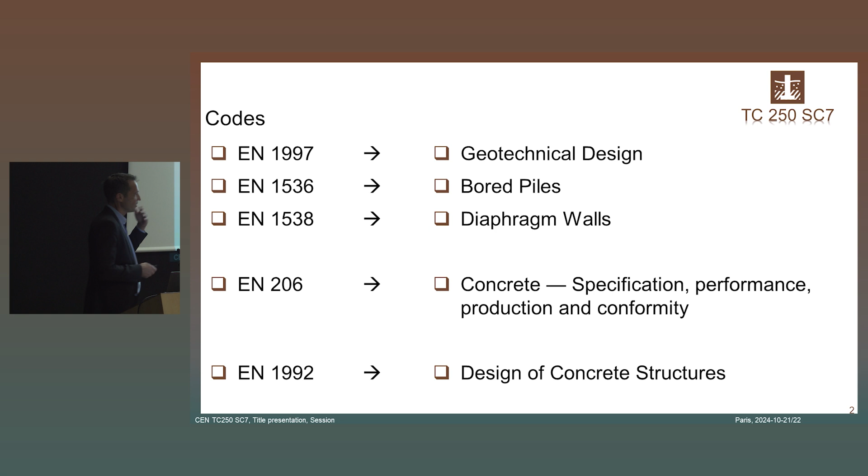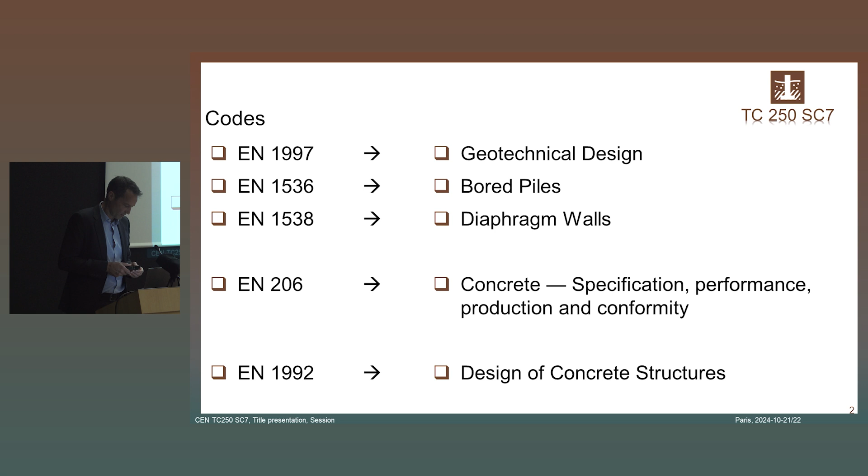These are the European norms I want to refer to. First, the top section is what I call the geotechnical works, the design and then the execution, where there's a very strong link between them. For many of these geotechnical works, we need concrete, and if it's reinforced concrete, we also need the structural code for concrete structures. That all together makes it

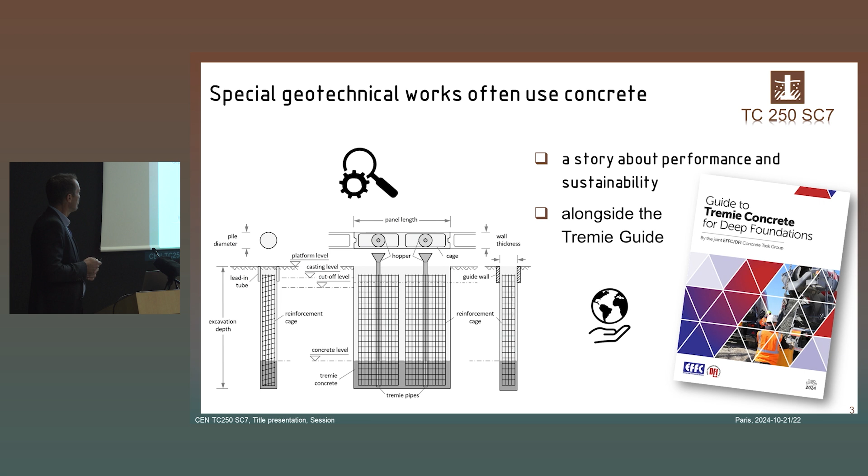the special geotechnical works, which is a better word for me than deep foundations. Anyhow, we often use the word deep foundations, and that's a link from the industry, from the European Federation of Foundation Contractors. We established a guideline making kind of a bracket of all these codes, from the design over the execution and with the concrete, as you can read by the topic, concrete for deep foundations. The link is the concrete in the end, because these kind of deep foundations or retaining walls we have to fill with concrete to make it a functionable, reinforced concrete structure.

So that's more or less the red line I want to use. This is what you design and what we execute, if it's not perfect, let's say. And these imperfections had been the reason, more than 10 years back, to introduce a group of experts from consultants and from the industry to work on this Tremie guide, we call it in short Tremie guide, bringing all the aspects together from the design over concrete to execution.

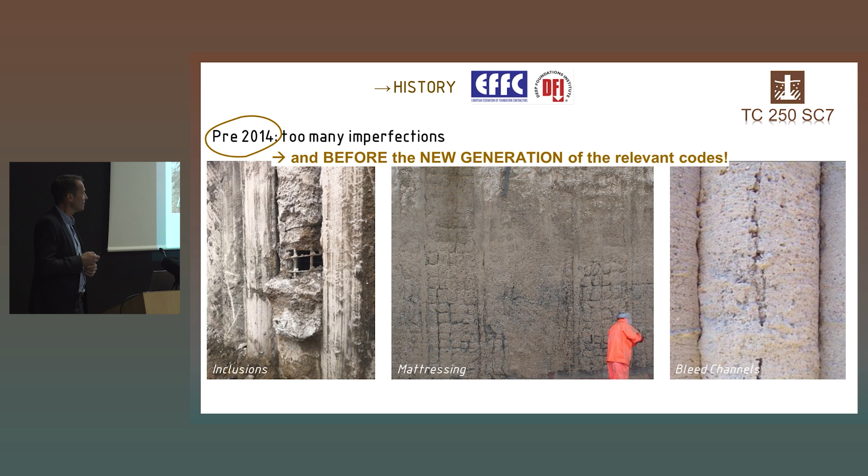So what we want to avoid is these very bad inclusions where any material is trapped into the permanent works. The middle one more or less addressing the lack of enough reinforcement cover, or not enough clear space for the concrete to flow through, or bleed channels, which is often a minor issue, but anyhow it's obviously an imperfection to these works. And if it's bad, then it's at the right.

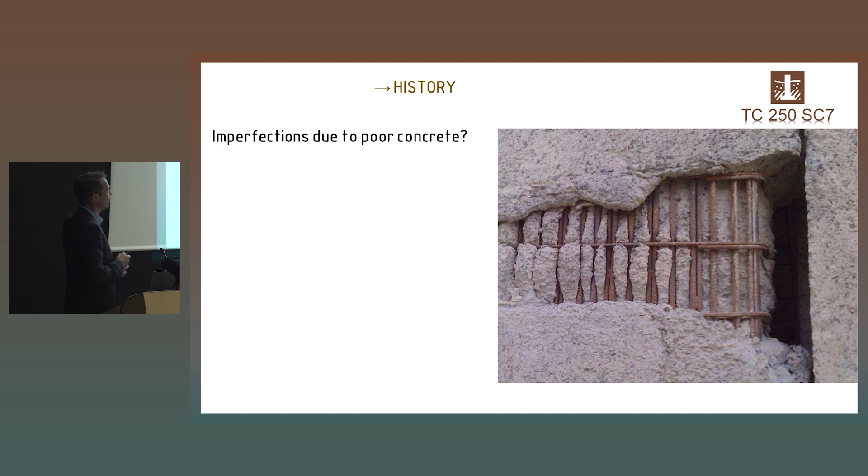I like to use this example from a study in the Netherlands, titled Bentonite Inclusions, where you can see that someone already made some pre-assumptions about what is the reason for this faulty or defective diaphragm wall panel. And in fact, it's a complexity in the end.

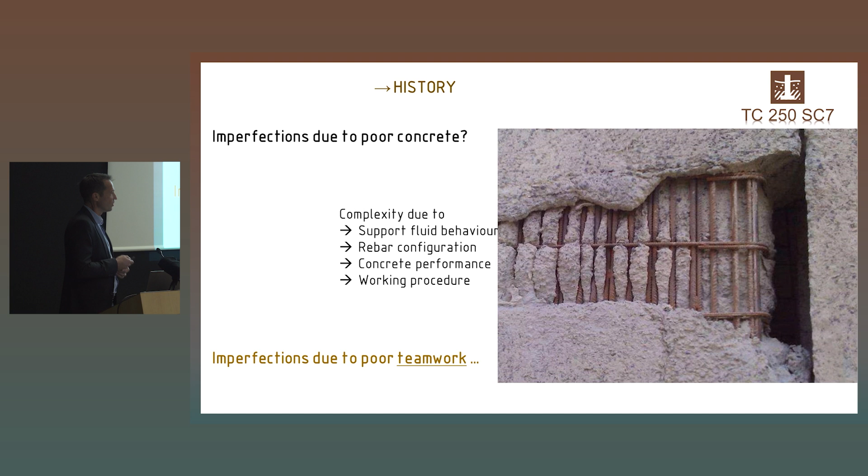So you see in the middle, or you can at least assume there is overlapping bars, so the reinforcement has just a little space for the concrete to flow through. So it's a splice section. It can be the bentonite, can be working procedure, or just a bad or poor quality of concrete. In the end, I would say it's not the perfect teamwork which led to this bad example of geotechnical works with a defect.

This is just going a bit back, because we try to find out what happened to the concrete over 50 years. Let's say 50 years back, when the concrete was what we call a three-component type of material, just aggregates,

cement, and water, life was quite simple. And we had a principle of good workability at sufficient stability, which means no segregation of gravel, etc. in the concrete. And then we had this application rule in the end.

With a new concrete, or new generation of concrete, already many, many decades old, we got additions and admixtures as well. So you had a lot of ideas to compensate your concrete. And at that time, when the standards were just not developed further, just copied and used again, we ignored this principle of good workability at sufficient stability, because the material is not the same anymore from its rheology.

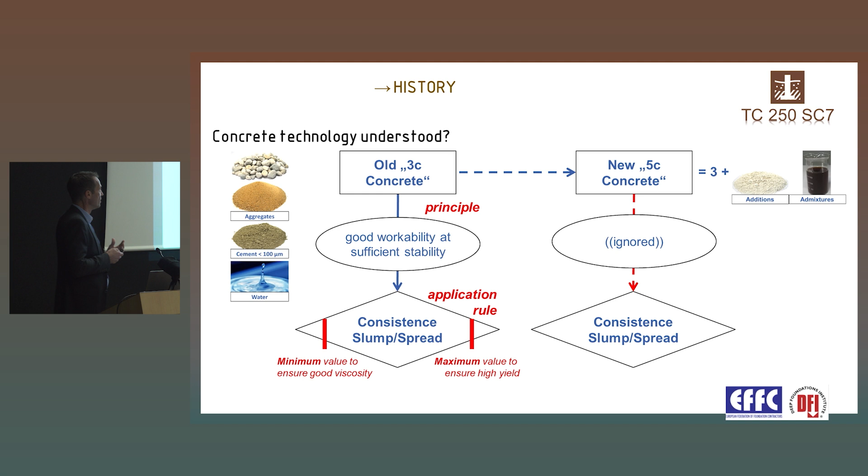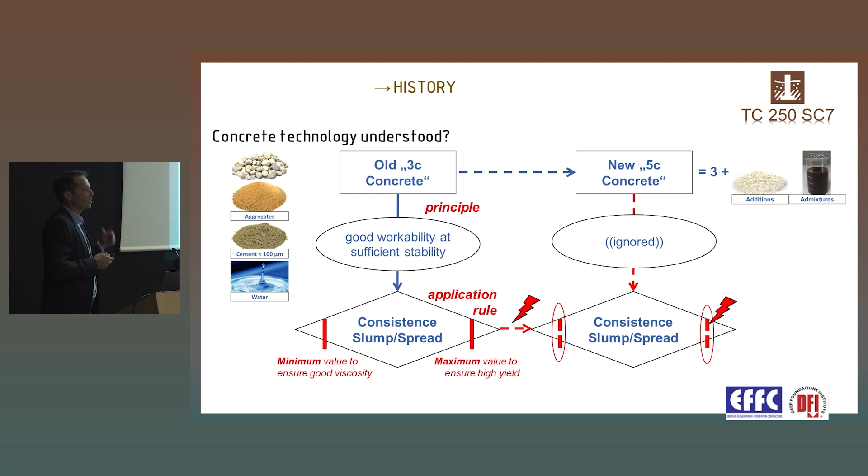But we still use the same application rule, consistence, and for slump and spread. That's the only one, let's say, measure we can take, or we took at the site. And that was the starting point, that we have to change this one.

We started the group, that's very short. We started the group in 2014. We had a very large, extensive research program with two universities in the US and in Europe.

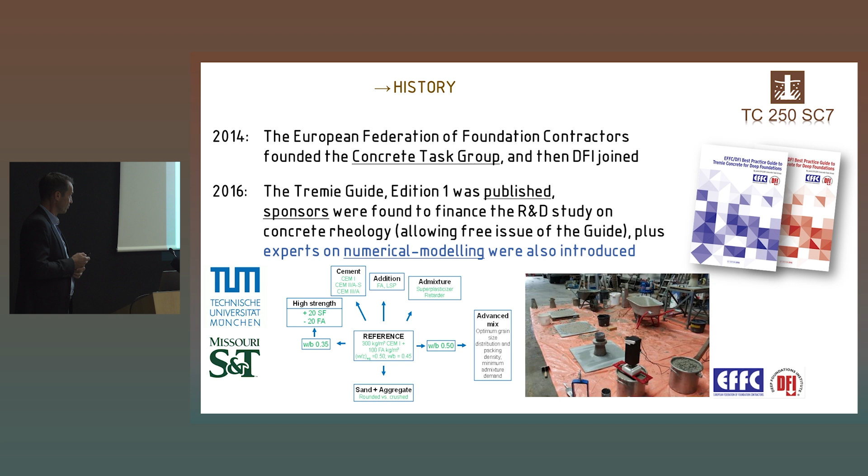And then we brought out a second edition of this Tremie guide, having all this information included, and proposing new acceptance criteria, new ways to design concrete, and to really rate the quality of concrete by a performance-based concept.

If you want to see more of these, you're invited to Bruges in Belgium next year in May, where there's this EFFC conference where you can see more examples of practical applications.

This new third edition of the Tremie guide is coming out this month, in November, and it has still the same agenda. You see with the table of contents that it connects all these aspects of design, design related to cage detailing, and then specifying and testing of concrete.

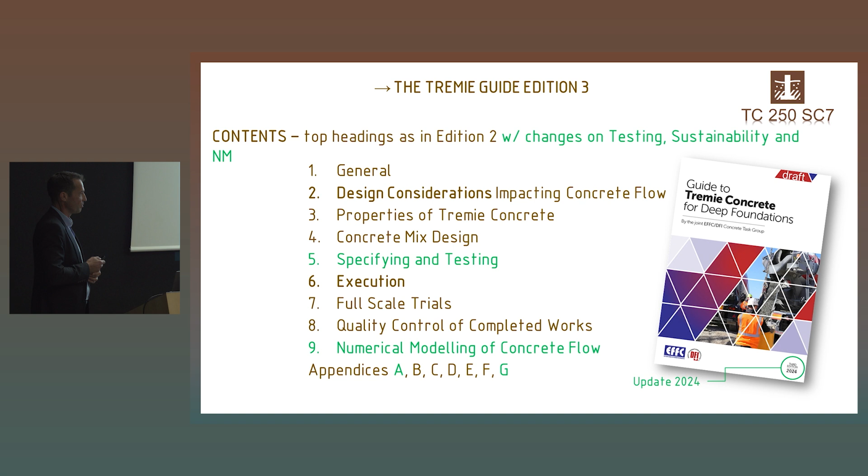We have many execution examples and recommendations in there, but we also talk about full-scale trials, the connection to EC7, quality control of completed works, and non-destructive testing. Section 9 is still an evolving chapter on numerical modeling of concrete flow, because we can learn a lot from numerical modeling, much easier than doing full-scale trials in the end to learn.

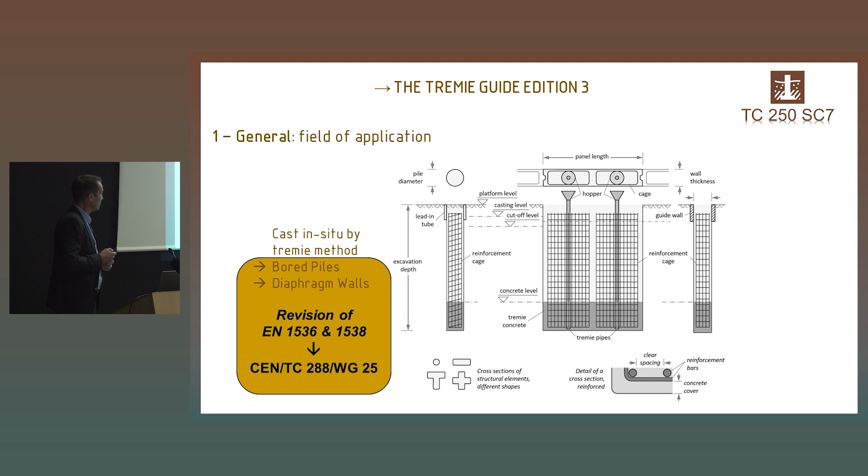In this graph, you can see that all these norms are connected as we go through the course of getting the right concrete for a certain job site. We start with the design, then the structural design in any case, and then we need the constructor with the concrete experience and knowledge to balance the concrete in the right way.

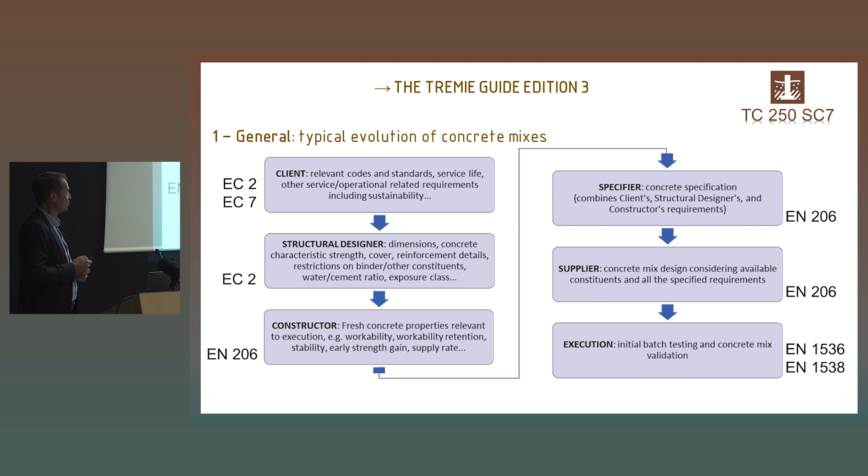And in the end, you have to order something at the supplier, and then we come to the execution and just have to fill the concrete in the borehole or into the trench. This will probably also be in the new EN 1536 and 1538, with 1538 then shown with a rectangular picture.

And we use the same terminology, of course, as the Eurocode. In the former version of the execution standards, there was a bit of a misunderstanding, I would say. C-nom, C-min was a bit controversial, but we will clean it up, and in this Tremie guide it's already done.

So if you want to go for a nominal concrete cover, you have two reasons, and you should choose the value from structural reasons or executional reasons. But the maximum value is, of course, the one you have to apply in your cage detailing. I'll come to this later—it should be 75 millimeters at least for C-nom.

The spacing itself is much wider than the structural works the EC2 guys usually know, because we need to have the concrete flow by itself, just by the weight of the concrete head on top, through the reinforcement, as you saw with the picture before—it might be hard to flow through a very tight opening.

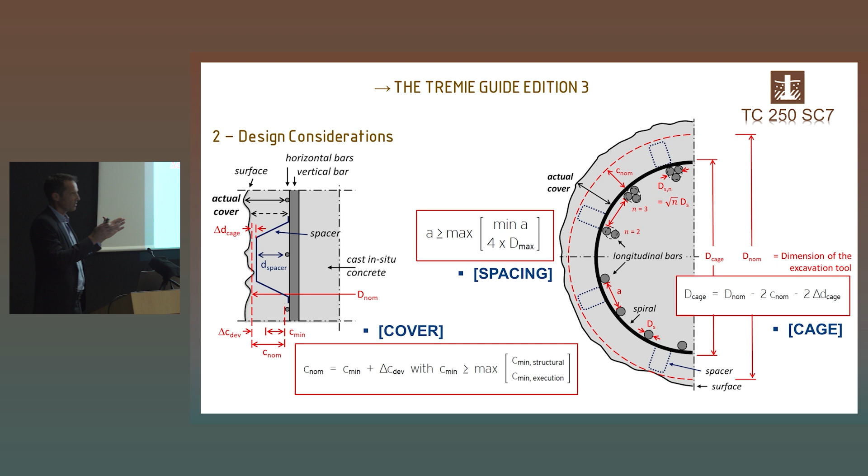That's why we have this absolute minimum value of 4 times aggregate size, but depending on the aggregate in the concrete, there's also a minimum value, usually 100 millimeters for deep foundations, so at least a space of 100 millimeters to get the concrete through. And on the very right side, as always, you need some play for the reinforcement cage to fit into the excavation.

Again, as we have pointed out in the Tremie guide, there's two reasons for concrete cover. One is for durability in the end, when you have your final product, and the other is just to get the concrete there where you need it—that's for execution reasons, which shall be covered also in the future by EN 1536 and 1538 for piles and D-walls.

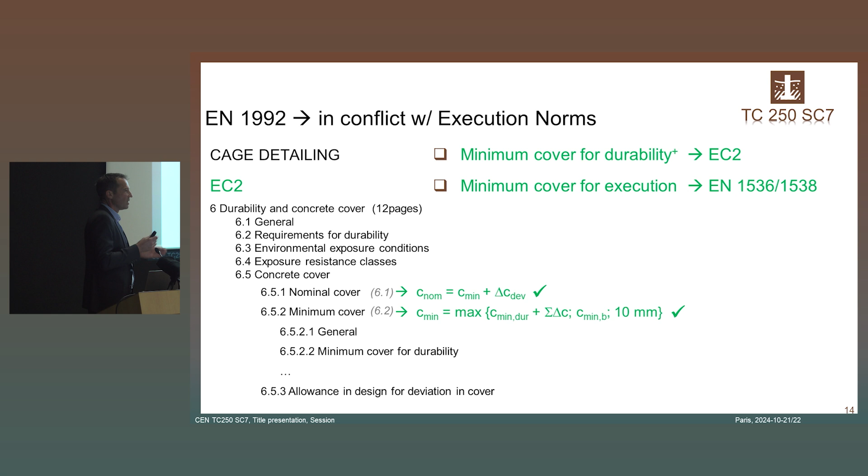I think it's sure it's correct to have this C-nom equal to C-min, minimum cover plus an allowance for deviation. That's standard practice for years, for decades, no question. And the second line is also fine. The minimum cover itself is already a maximum of several values.

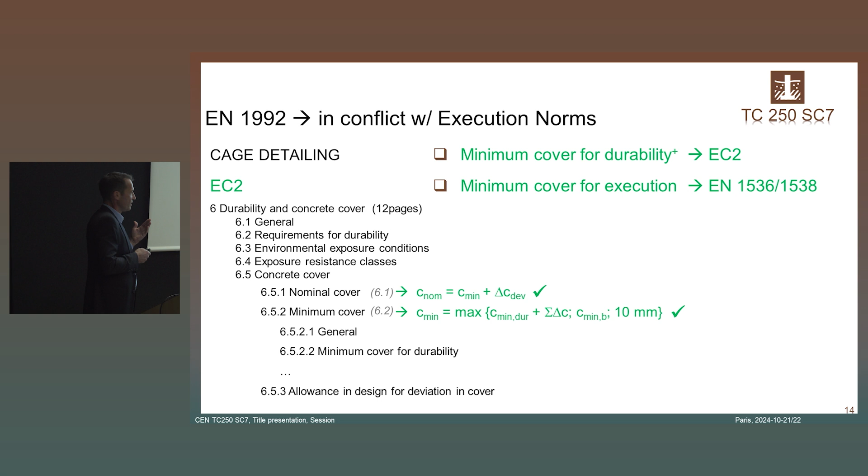It's either for durability, which is normally the decisive case for us, for bond, or at least 10 millimeters, that's the absolute minimum. With durability, there's also the sum of additional delta C's which you shall take into consideration. For example, there's also a possibility for deep foundations to reduce the minimum value for durability, but probably seldom used, but let's see where we go.

So you can use it if you have a shorter design life than 50 years, for example 30 years, and if you have a very good curing, which we always have in deep foundations. So why not use it? Sometimes we use it, but also only in cases when we need an excuse.

Minimum cover for durability, it says the minimum cover, concrete cover C-min-dur, depends on design service life, exposure class, and resistance class, given in table 6.3, and this is an NDP. But of course it's the EC2 working groups looking into these NDPs, not us. Come to this in a moment, because if you are in one of these national groups, maybe you have a reason.

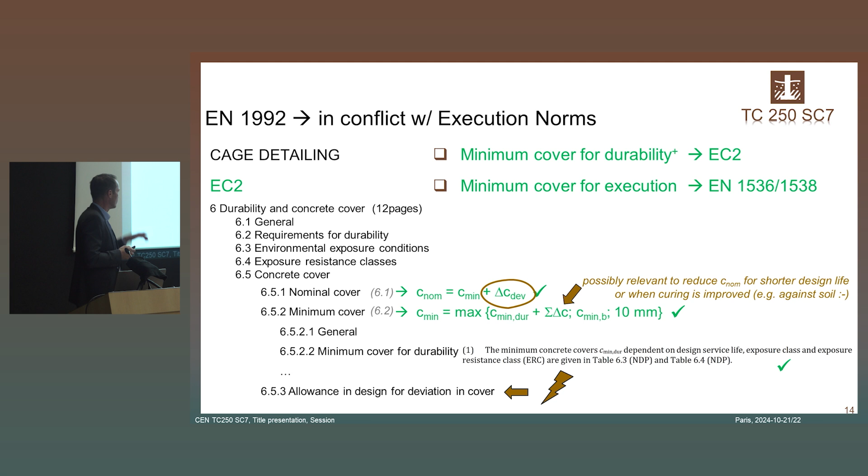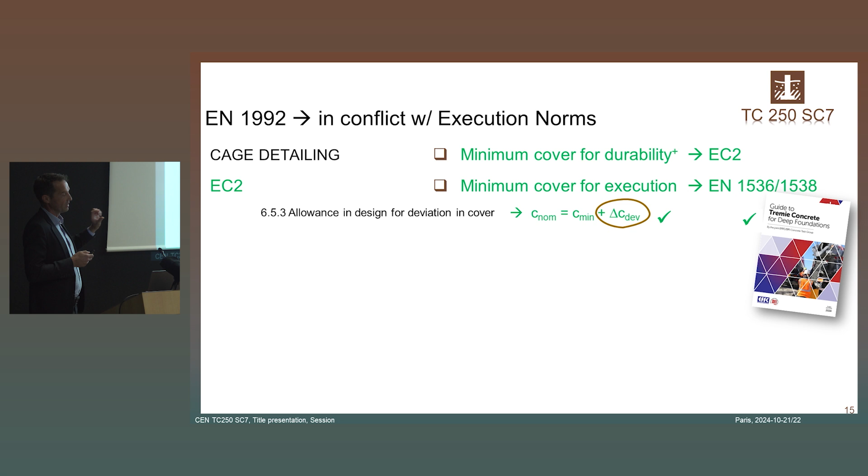So with the allowance in design for deviation cover, I see a conflict with our daily practice and with our experience from 50 years and more. Again, it's no question that we have to add something to minimum cover. This is where it refers to table 6.7, just for this deviation in cover.

There's a note, so first of all it's a shall, no question that we have to take it into account, and it has to be specified in the execution specifications. So that's the value you need to respect in the end.

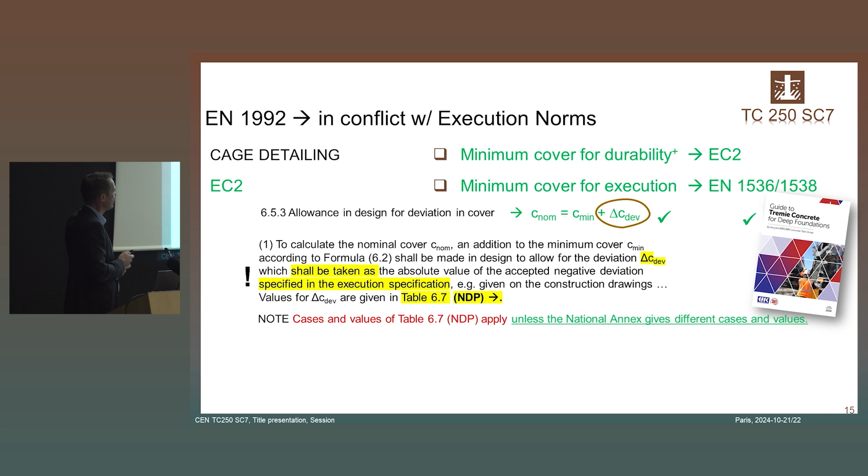Values are given in table 6.7, and this is an NDP, which means we can change table 6.7 - not me, but the national annexes.

In line 9, and this is a dispute in the end, concrete cast directly against unprepared soil should have an extra allowance of 75 millimeters. And I put this index A here. These allowances for different deviation also apply for bored piles and for diaphragm walls designed according to this Eurocode.

So in the end, we have to apply it. There's no way out except we change the 75 millimeters to another value, which I would propose. So even for a relatively low or normal minimum value of 30 millimeters, which is already 25 plus 5 millimeters for another reason, plus 75, we would have something like a standard case of 105 millimeters of nominal cover for a standard bored pile.

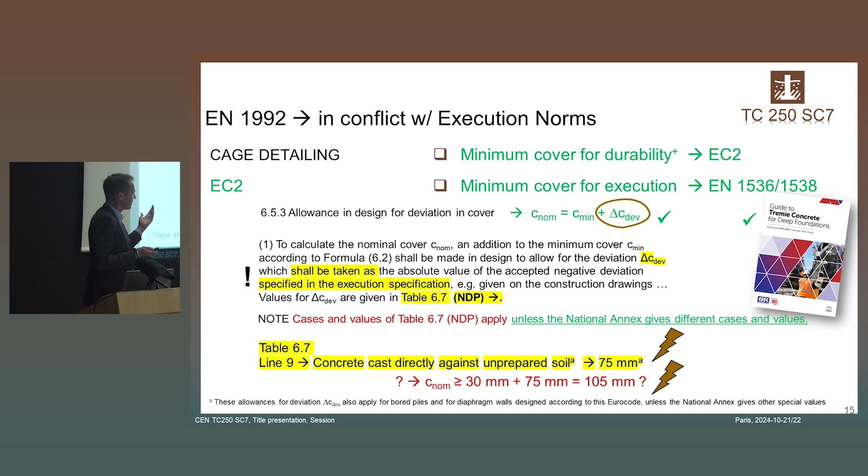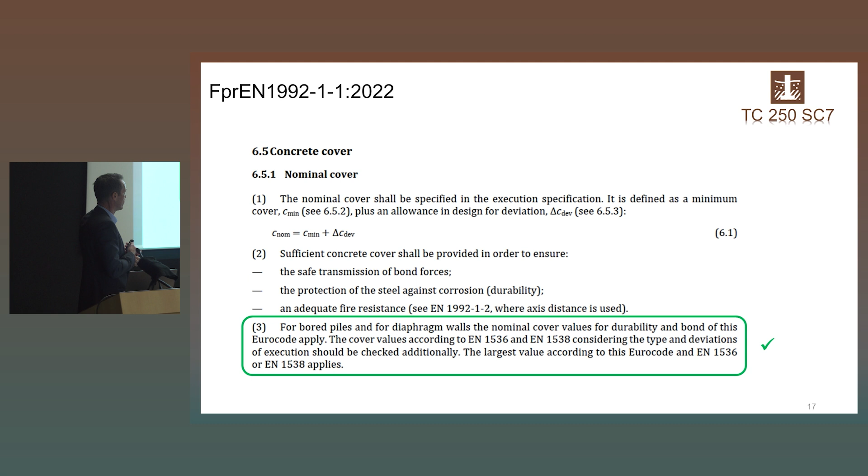And that's what I mean with a conflict I'd like to address here. So this is just a few slides which is probably not in dispute at all. The definitions are fine, everything is good. That we need for bored piles and diaphragm walls nominal cover values for durability etc. is clear, and the Eurocode makes clear that there might be other values in EN 1536 and 1538 for execution. All good, that's no debate here.

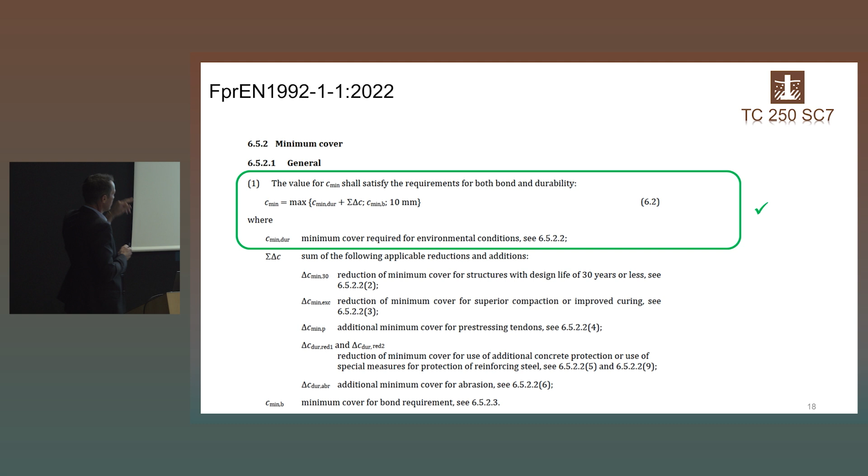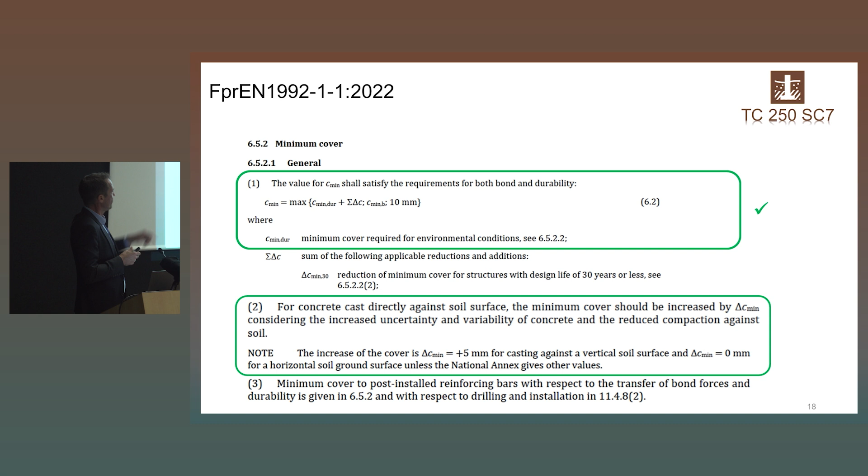But it starts with the value for C-min, with this small sum of delta C, where we have another 5 millimeters for the reason - so it's also noted, the increase of the cover, just the minimum cover, not talking about the allowance for deviation. Another 5 millimeters for casting against a vertical soil surface has to do with the observation of not perfect concrete in the cover zone, giving a reason for some more sacrificial layer. But the 5 millimeters, I would say, we have to the outer side anyway.

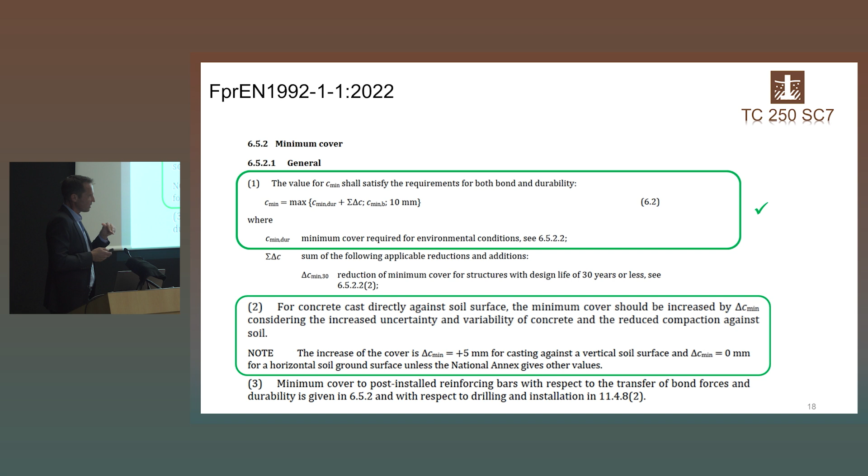So we were from France and from Germany, we were applying comments to these codes, but there would have been just put it in a note, and still you can change this value in a national annex to 0. I would recommend this, because we have a good reason for sorting out the necessary cover in the execution standards, not in the design code.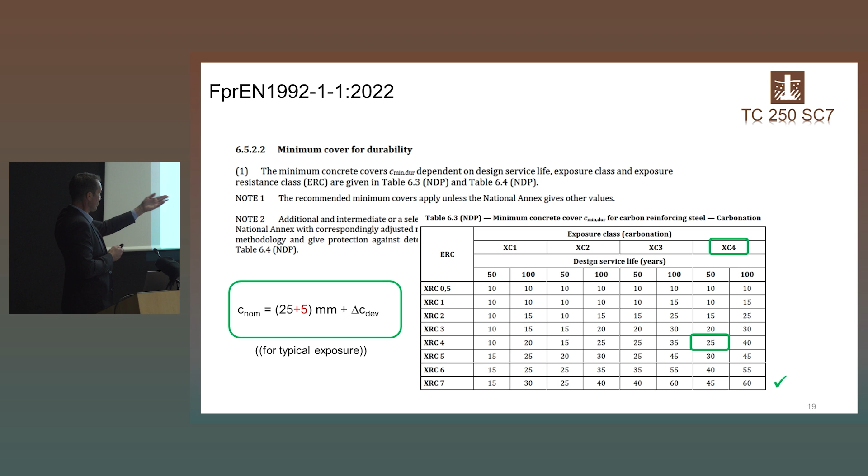Again, so this is where you get these numbers for durability from these tables - 25 millimeters for this example. You have to add this 5 millimeters sacrificial cover, and then you end up with these 30 millimeters plus 75, as I showed before.

You would end up with 105 millimeters. So again, you might start with reducing by 5 millimeters here and there for any allowances in the code, but in the end you will end up in a region of 100 millimeters standard cover.

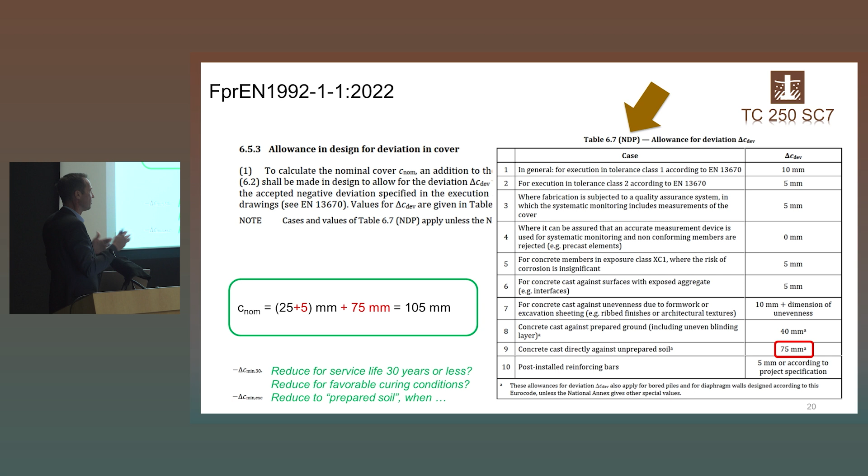This is a famous table 6.7 with line 9, concrete cast directly against unprepared soil. In the former code it was already unprepared soil, but we always said when we drill or bore, the soil is not unprepared anymore since we prepare it for filling concrete in, which is a bit of a weak argument, but with this footnote A, that's gone.

Coming back to the execution, that's what we have as a proposal, because the guide is only a recommendation, but we will have the same in the EN 1536 and 1538 in future, that we clarify we have a minimum cover and a nominal cover, and a deviation, with 50 millimeters as a minimum cover, just to allow the concrete to flow through the reinforcement and to embed it.

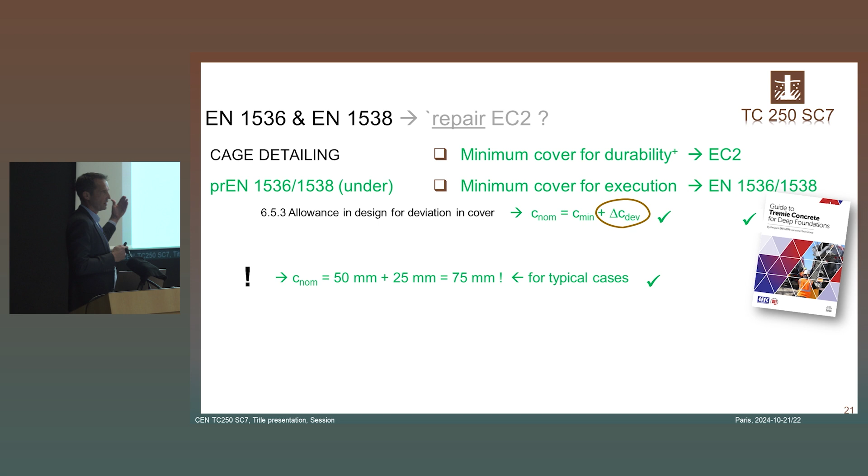We are usually above the values from EC2, plus 25 for allowance, which gives us a normal case from a practical reason for 75 millimeter of nominal cover, which is still a good value. So C-min exe, and we use the index exe for execution here.

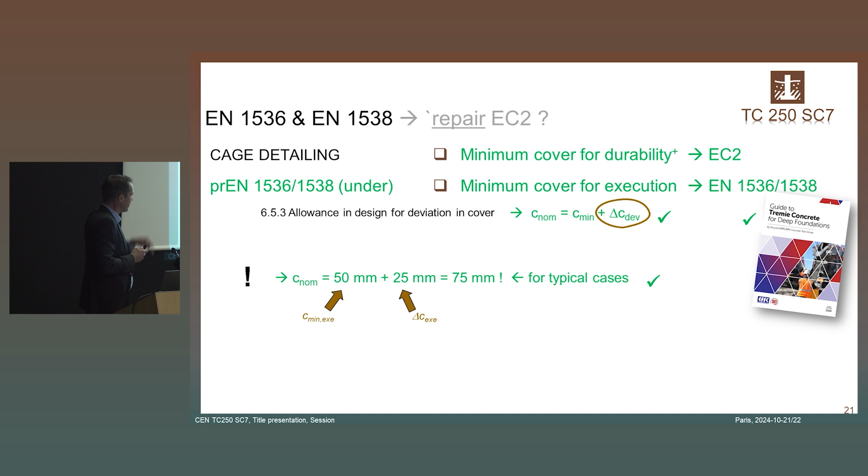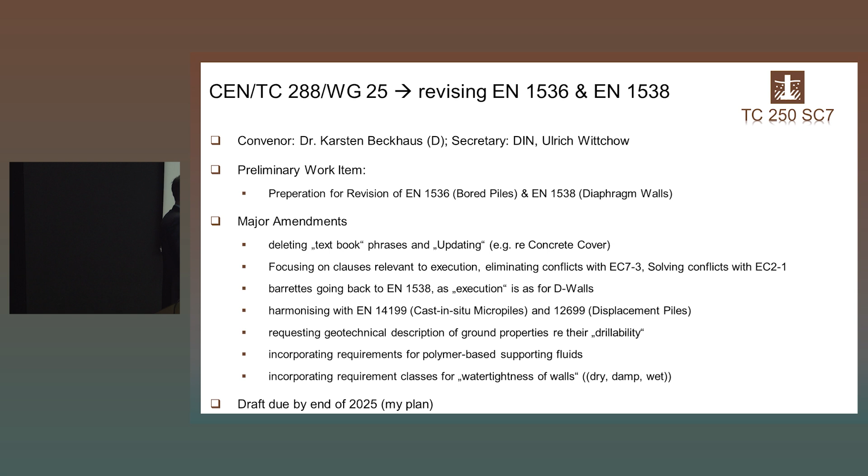The EN 1536 and 1538, as said, are under revision right now. I'm the convener. We are more or less in the middle of that work. We have some major amendments which will be obvious in the end, so we make it quite shorter. We have deleted already lots of textbook phrases. We are updating the whole guide, the whole norm.

For example, with this C-min and C-nom, we have sorted out some conflicts, I think, where the EN 1536 and 1538 took a bit too much notice of designing things, so we sorted it out. We reduced the number of design considerations and tried to streamline them into the relevant section. So I think there's no conflict anymore with EC7 and execution standards. But we have to solve the issue with EC2 if we can in our execution standard, so at least we will try.

The barrettes, maybe some of you know that the barrettes had been in the piling standard before. They go back into the diaphragm wall execution standard, where they belong, I would say, just from the execution point of view. We are harmonizing with the EN 14199, sorry, micropiles and displacement piles.

We request geotechnical description of ground properties regarding their drillability. That's new, I think, because it's not only design, we also have to plan our works and to price our works. That's why we have this drillability or excavation ability also as a task in the execution norm.

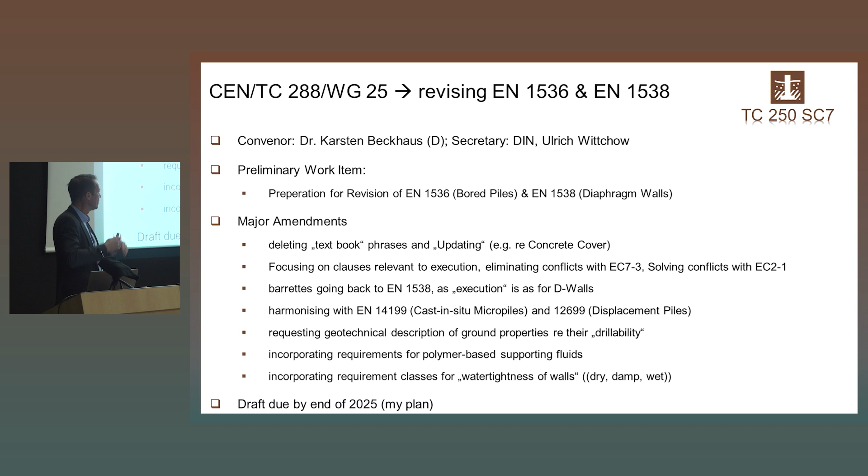We are incorporating normal requirements for polymer-based slurries, not only for bentonite slurries, so we really put them on the same level. And we will introduce probably a table on water tightness of walls, because it's always very often a dispute what is watertight in the end. So we try to make a clear link to the execution standards as well.

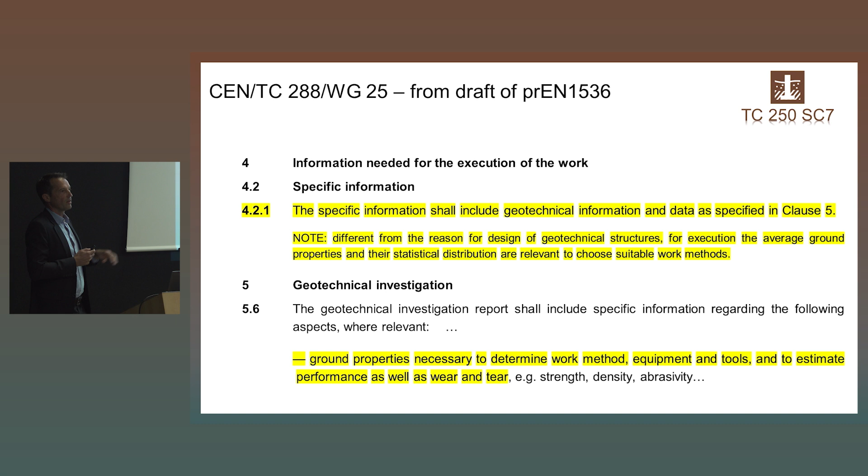So that's just a few examples from where we are, in this specific geotechnical information, that's what I said, regarding drillability, ground properties necessary to determine work method, equipment and tools, and to estimate performance as well as wear and tear. For example, regarding strength, density, abrasivity. This is given as one example for relevant information which should be given to the contractors.

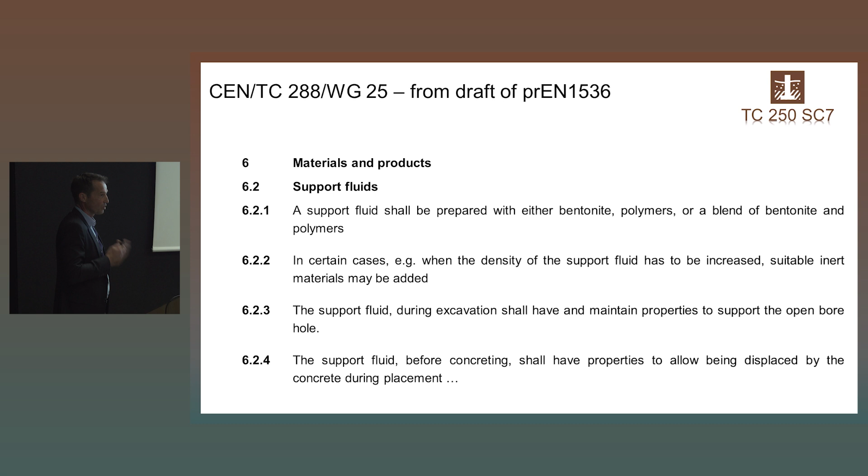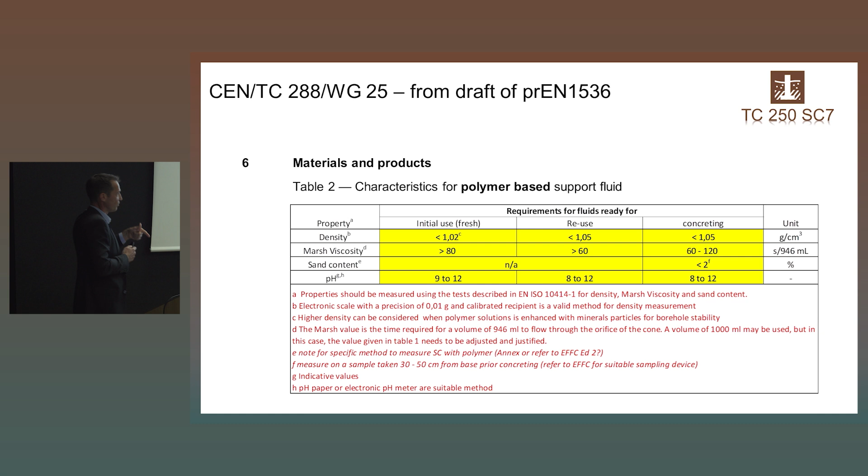Materials and products, just to say, the support fluids, there's one chapter, bentonite, support fluid, doesn't matter. So you can have also tables where we are still discussing the values in the end, which you will have then for acceptance. But there will be two tables, at least one for bentonite, one for polymer, maybe a second one for different kinds of polymer-based material, because it's also very extensive. And this is completely under progress.

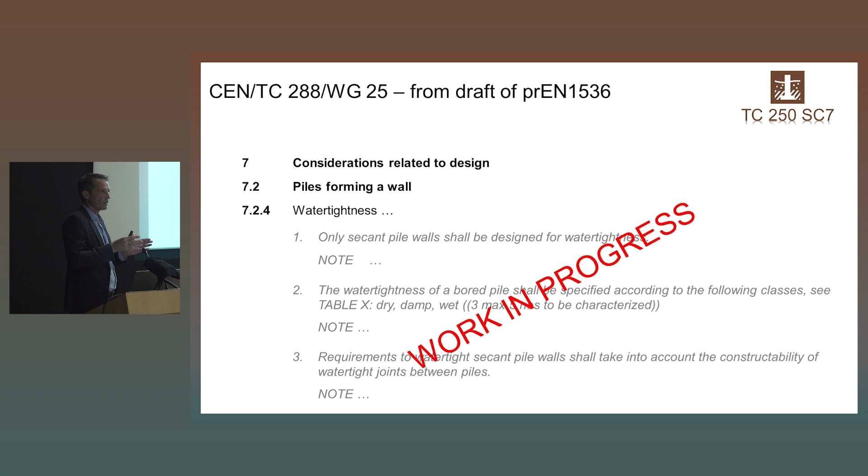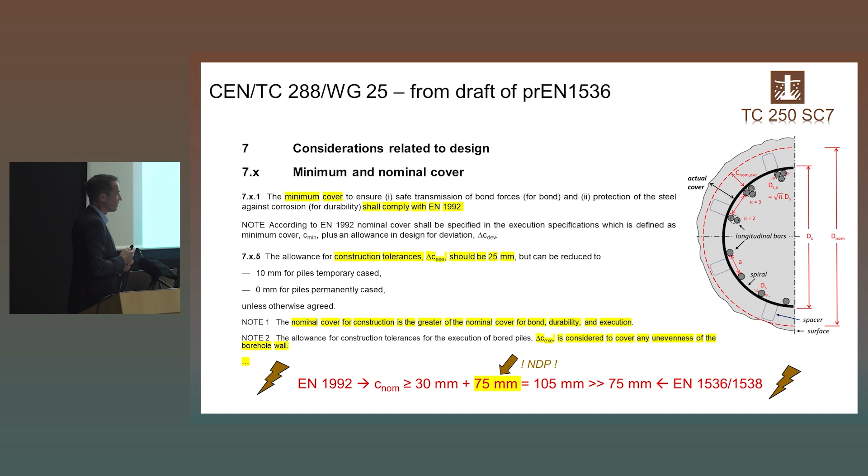The work on how we define the water tightness of walls should be equivalent more or less for D-walls, for bored pile walls, of course different what you can achieve, but at least the depth of requirements should be parallel in both standards. And again, I don't go back into detail here, so we will focus on the cover and spacing of rebars necessary to install piles and D-walls of high quality. And again, we have to live with this NDP probably, that is to be solved in each standard body.

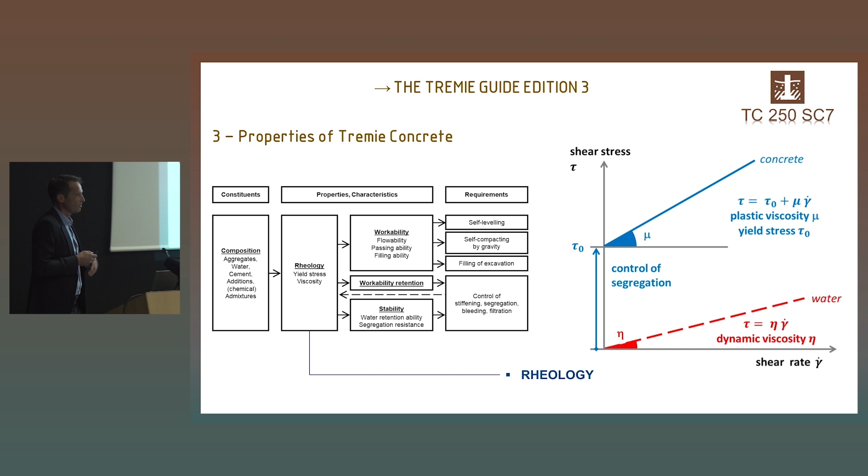Coming back to concrete very shortly, just to show that we also go into detail on what the rheology of the concrete is, to understand the concrete in this context of geotechnical works, and what is in the center of this table, what properties and characteristics we can really control, we can check, we have tests for that, because rheology is very complicated, but you can't have a rheometer on site everywhere, so we need to get back to simple questions and simplify the material by its performance.

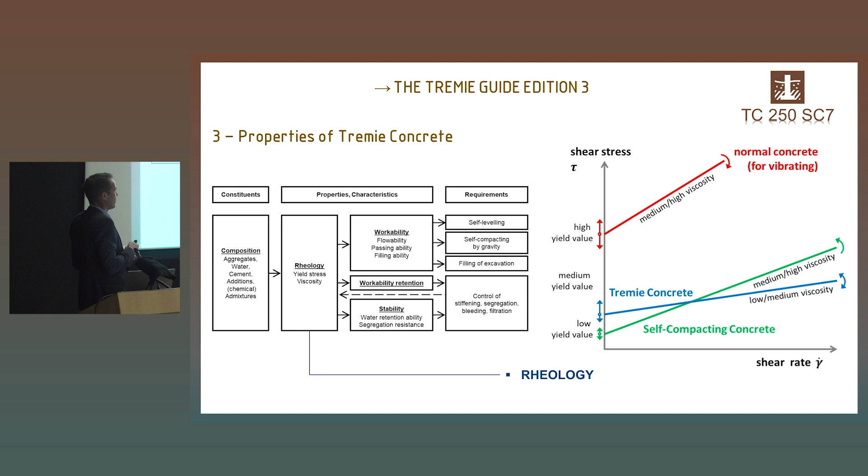The blue line showing tremie concrete - it's not a concrete you usually vibrate, it's not a self-compacting concrete, so we need expert test methods for that. And of course, for the concrete supplier, it means we need to have another concrete mix design where it goes back this line. What is the control possibilities of concrete we have?

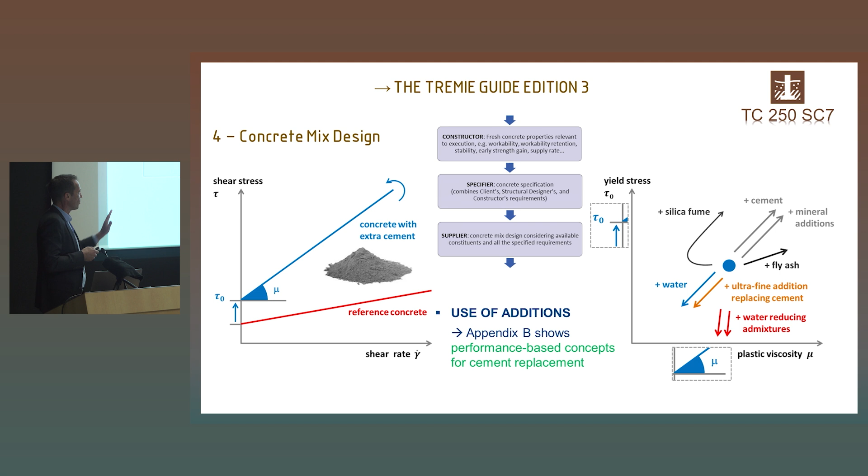What is the impact of different additions? But that's all sorted by the concrete specifier and the concrete supplier in the end. He has to understand, but we have to give performance values for how we want to define the concrete so that it really is workable enough.

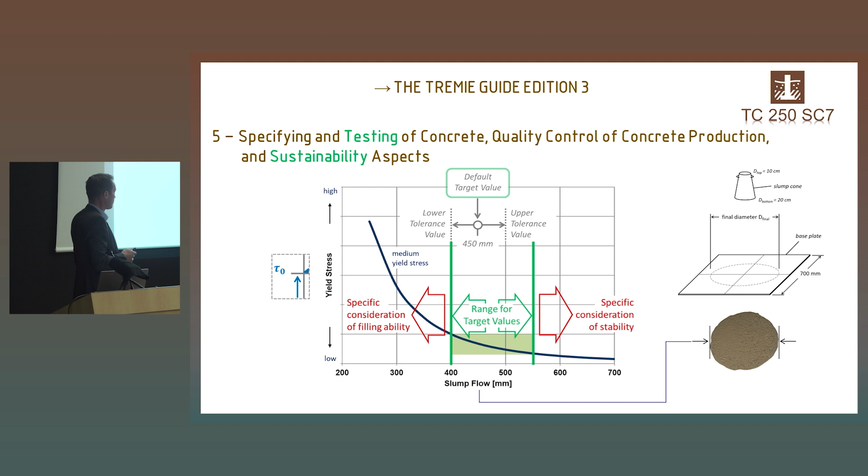Expert tests are necessary for our types of works, because often we have very long pouring times, which is specific, different from other types of concrete works. That's why we usually need some admixtures extending the workability lifetime of the concrete, and also we need tests for that. This is all under the scope of the Tremie Guide.

And that's all to avoid having stiff concrete already in the excavation on the right side, and then having fresh concrete trying to escape somehow, which we call the volcano effect. And that's what we think is the reason for these inclusions.

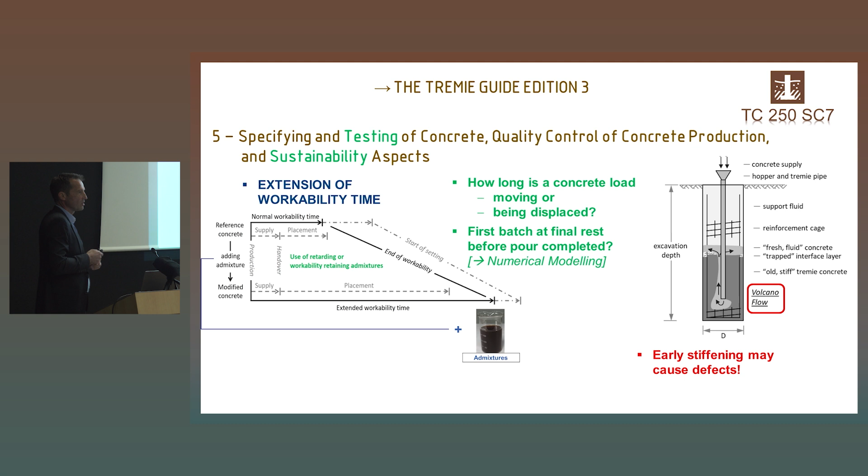I showed you one of the very first photographs. That's how it should look like, a bulging flow. That's what we expect to have in a reinforced concrete element anyway. And then we have this very simple recommendation or requirement.

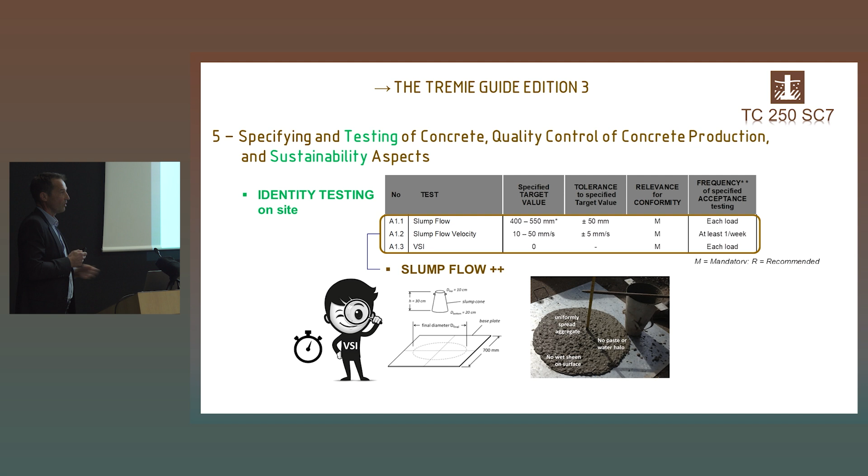Please do this test. This is your target value. Test it on site, and then everything should work, or you have to reject the concrete, of course.

Very shortly, all these findings and work done in the last 10 years with this concrete task group in the EFFC have been used to revise the EN 206. It was formerly the Annex D for concrete for geotechnical works. It will be in future a new Part 3.

Just on additional requirements for specification and conformity of concrete for special geotechnical works, which is kind of an upgrade, because it was an appendix or annex before - normative of course - but now it's an own part. And the same rules apply as before.

For tremie concrete we have extra rules, as I described before. And we have, of course, merged and simplified a little bit the wording, because before we had rules for diaphragm wall concrete and rules for bored pile concrete, which is the same type of concrete, so we put it together as one tremie concrete in the end.

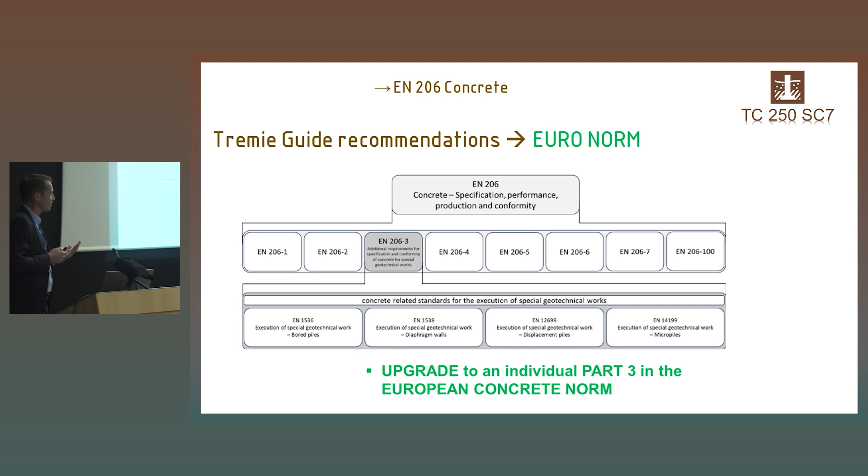This is some of the terms and definitions you will find in the new EN 206 Part 3 for concrete for geotechnical works. So words like workability have not been in the EN 206 mother part, for what reason I don't know. Stability, workability retention - that's the reason for this long workability of concrete. So we have introduced new terms we need for specifying concrete for geotechnical works.

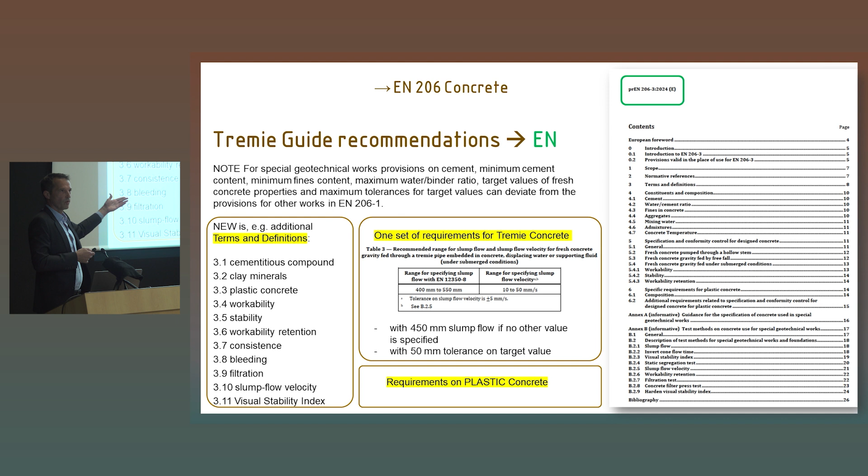In the middle part, you see this 450 millimeter slump flow as a recommendation for a new acceptance criteria for concrete workability. And what is also new is the requirements on plastic concrete. So concrete for cut-off walls, not only for structural walls. That's your 1 to 2 megapascal material you will find also in the EN 206 Part 3.

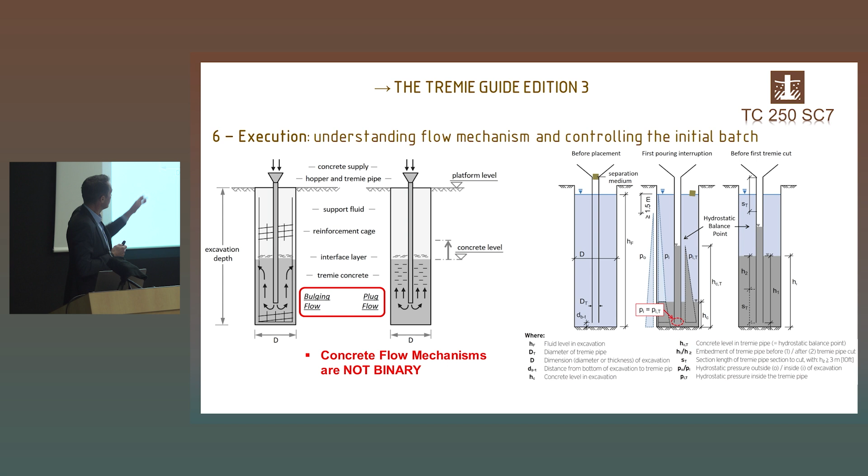Coming to the end, just a few words on the concrete flow mechanisms inside this kind of pile. On the very left side, that's what we expect for bulging flow in a reinforced concrete element. But to the right side, plug flow is probably the name. When you don't have any restriction to flow on the side, you just heave the concrete, the first load, to the very top, and you can still find the first batch of concrete on top even after 50 meters, which is not the case on the left side. It's not either/or though, something in between can happen, depending on the width of the panel or pile, and the height as well.

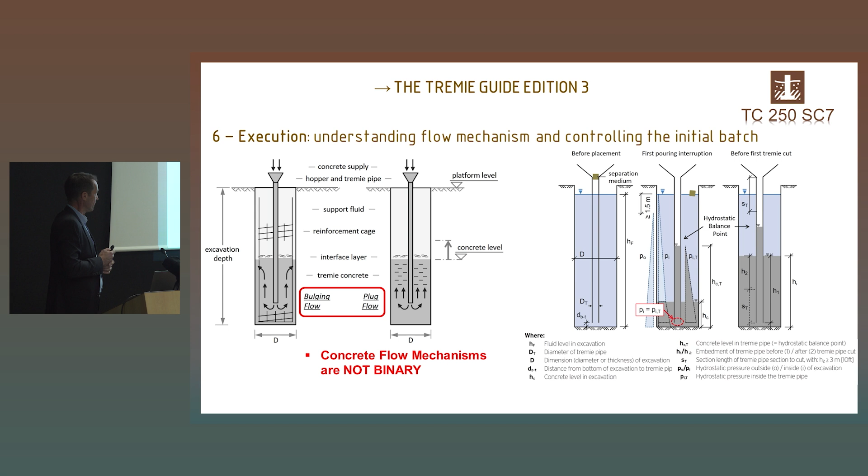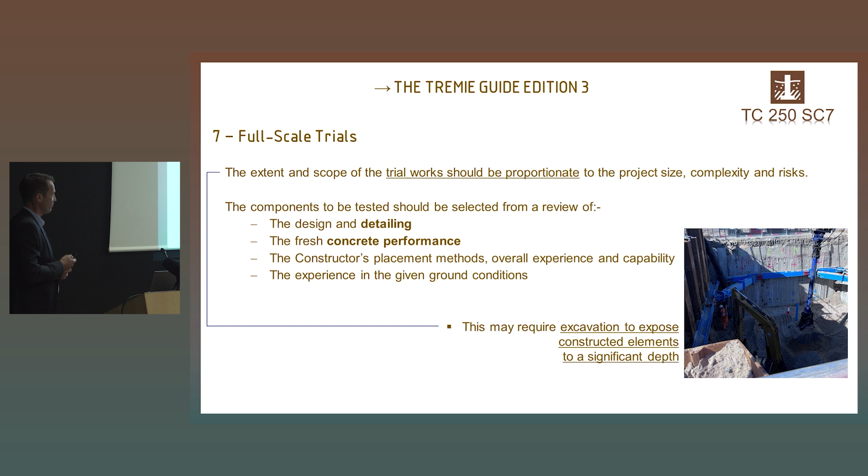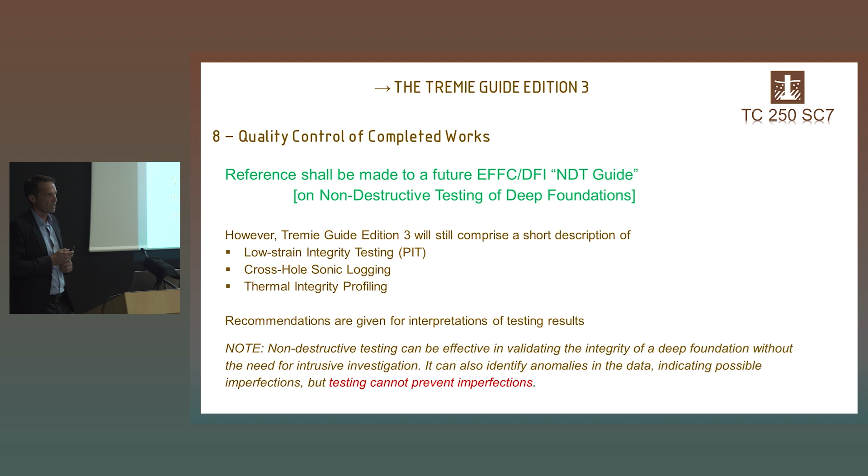Quality control of completed works. We have dealt with the typical types of non-destructive testing in an annex. In the industry, we've decided to have our own guide to non-destructive testing methods for deep foundations cast in situ. This is probably due to be established in another two years, but the current guide already has some recommendations on how to apply and where to stop, at least with the assessment of imperfections.

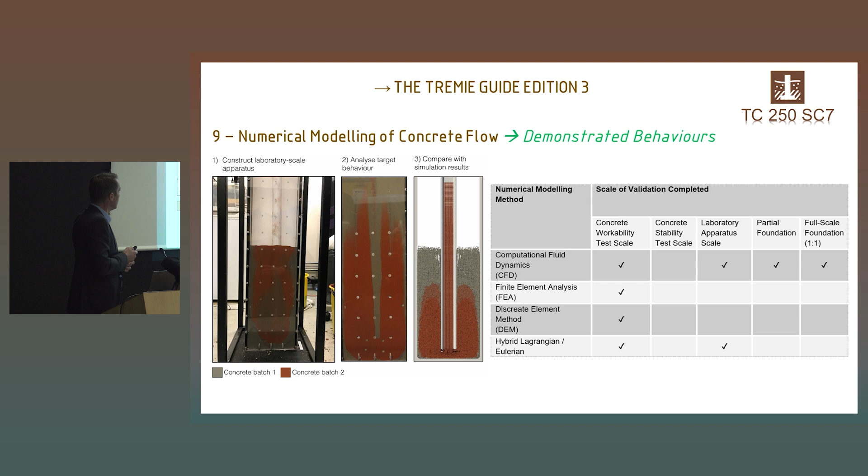Last but not least, there is very ongoing work with numerical modeling. When we started 10 years ago, we hadn't had numerical modeling of concrete flow at all on our list. With the second edition, we started to learn a little bit from numerical modeling. Within the last 5 years, the evolution has been enormous, and today we're looking back to a PhD thesis done in the UK, which is very close to this work.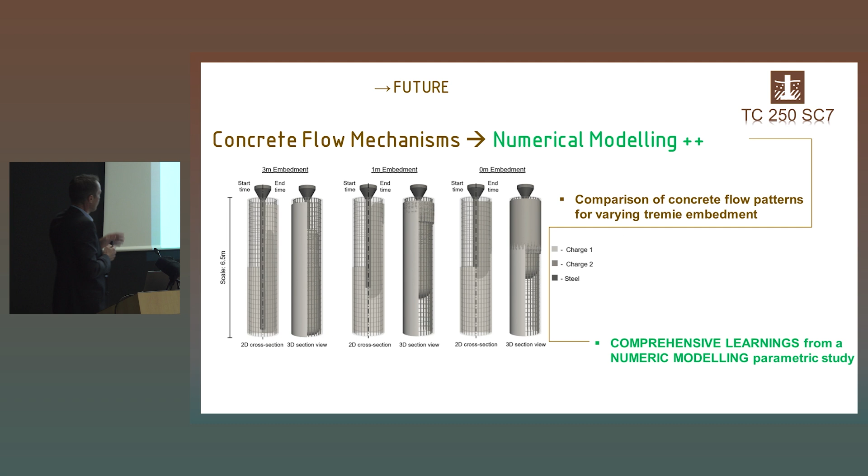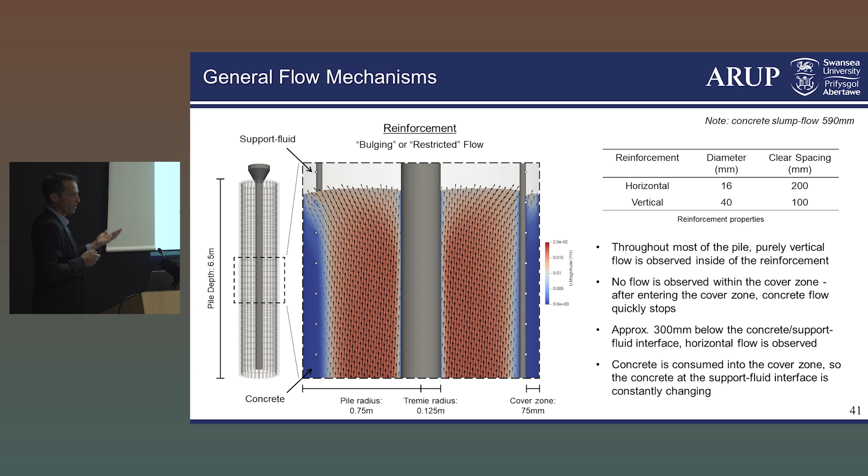This work was also accompanied by us, and we can not only learn because we know somehow how the concrete flows -- that's what we said, this plug flow, you can see it with streamlines how it works. When there's restriction to flow through the reinforcement cages, it looks different. So first you can simulate what we already know, but then you can learn by sensitivity studies -- what is sensitive to concrete flow in the end, and very detailed numerical modeling measures have been done.

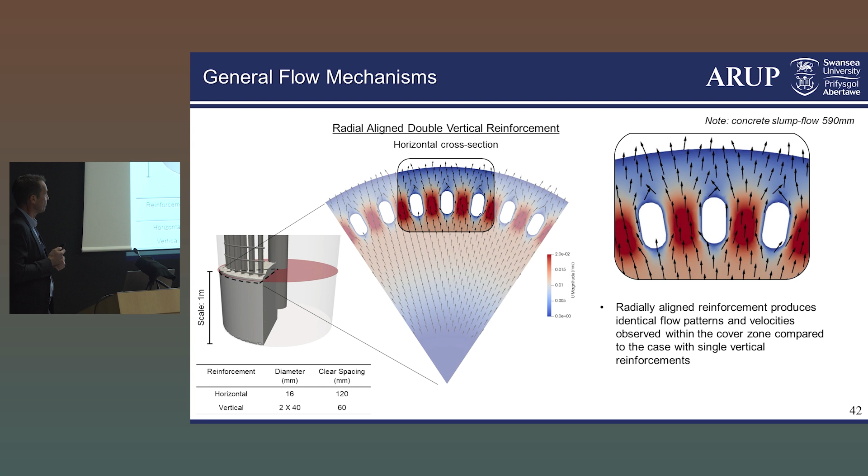On this, it's a very short movie, you can see the concrete -- I probably have to go here, because it at least looks quite nice... It doesn't work, sorry. Doesn't work? It doesn't work, video not available.

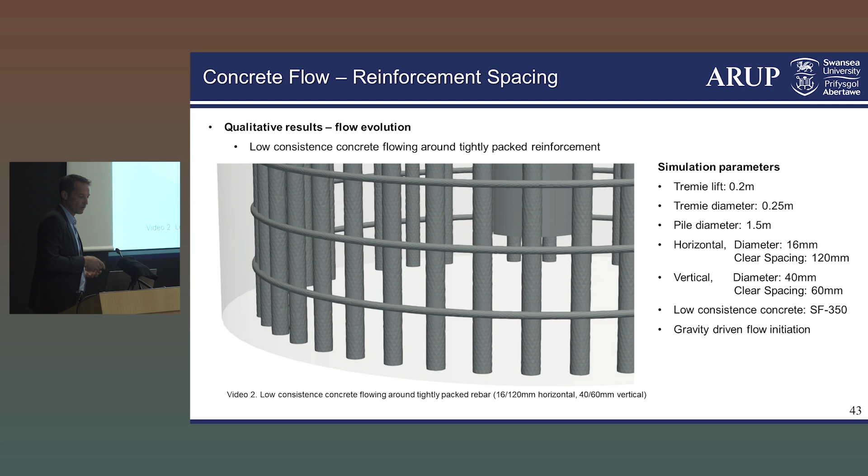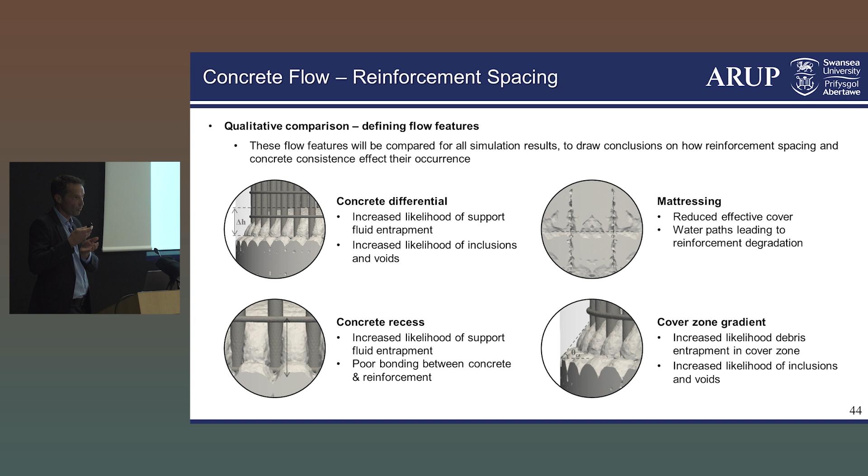No video -- but you would see that the concrete flows exactly like I said before. It goes sideways through the reinforcement, it will never really go up through the reinforcement, and that's what was proven by the numerical modeling and by several full-scale trials as well with dyed concrete, etc. You can learn from these detailed views what is the delta height inside and outside of the reinforcement. It gives you something of the quality of this complex situation, reinforcement with concrete. And if you have a support fluid in the cover zone, you also have something you really have to displace there.

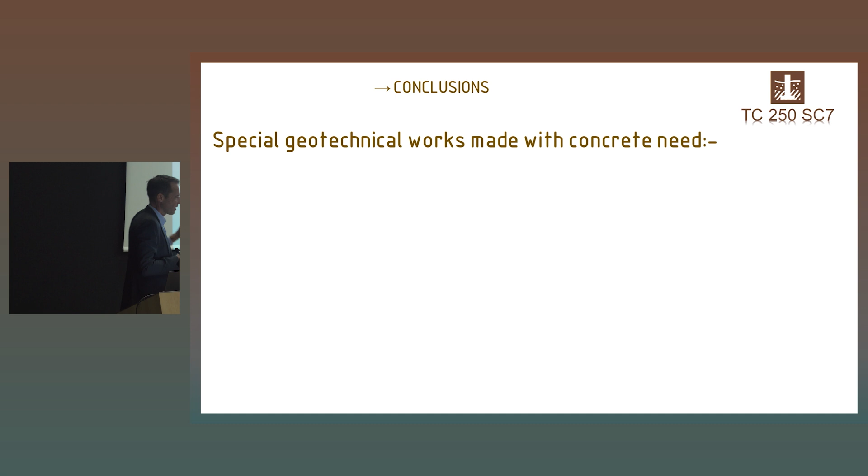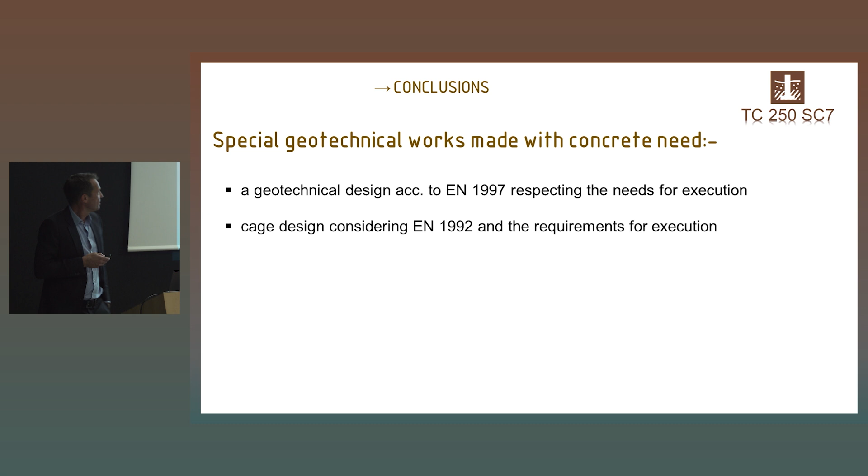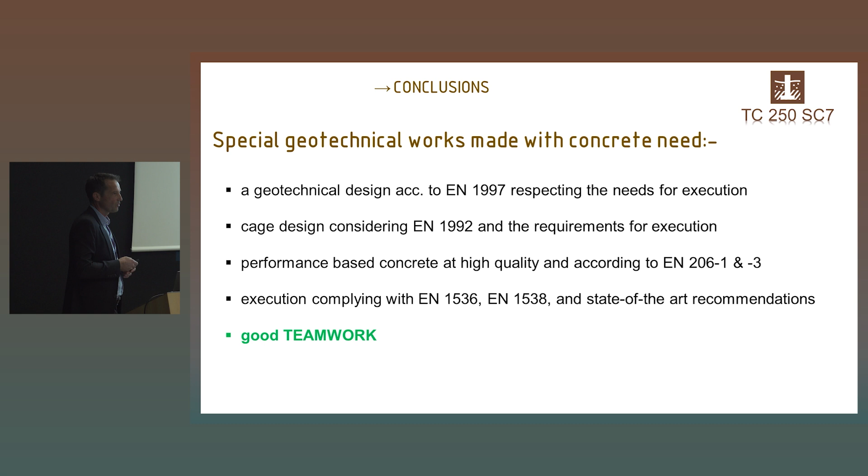So in the end, it's very simple, I think. Special geotechnical works made with concrete need geotechnical design according to EC7. We need EC2 respected, and also the requirements for execution -- that's where I've told you about my conflict with the 75 millimeters. Performance-based concrete at high quality, execution compliant with EN 1536, 1538 for deep foundations. We also have state-of-the-art recommendations -- the tremie guide is one example, I think very widespread over Europe and the US. But in the end, it's good teamwork we need, and that's the idea of this meeting here. Thank you so much.